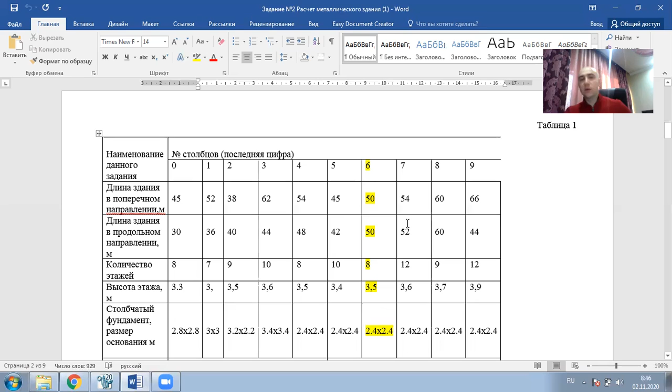Today we'll start statical calculation of the metal frame in the program software LIRA SAPR. Actually, like in our previous projects, we need to start with the initial data. So let's look to table number 1, and here we find the main information about our building, about constructions in our building, which I will accept.

Especially for this building, I will accept the last number of my ID, I think it will be 8. So 8 will be the last digit of my ID. So for the beams, columns, foundation, or wall, I will accept initial data according to the first letter of the surname, and I will accept from the S position.

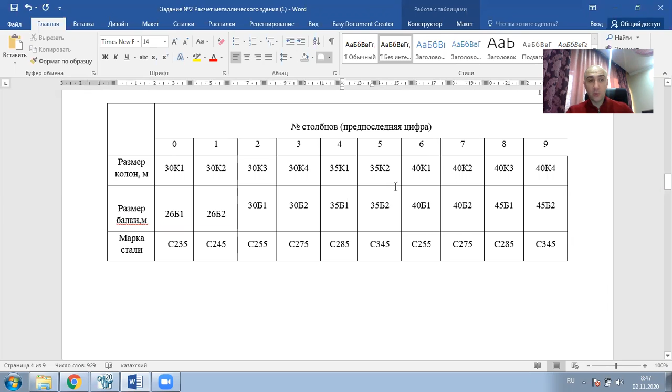And the pre-last number will be also 8. So 88. So what I have? I have that the length of my building is 60 meters. The length in cross-sectional direction also 60. There will be 9 levels. Each level has the height 3.7 meters.

For foundation, in this case, there will be column foundation. We know that in our previous project for monolithic buildings, the foundation was a monolithic slab. So in this case, it will be column foundation. Also there is monolithic slab overlapping with the thickness 150 millimeters.

Okay, let's start. We'll start from opening a new file, creation of a new document. Let's give the name like steel frame building. Okay. So we need to go to the generation of space frames.

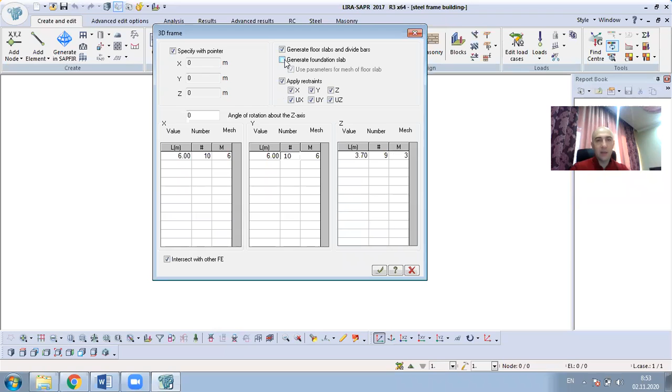The height of one level is equal to 3.7 meters. According to my initial data, I have 9 stories. I will accept 9, and the mesh I will apply 3. So here let's see. Use parameters for foundation slab. So we don't need the creation of slab. Divide for slabs, there's also no reason.

So we see that when I press the button for generate floor slabs, there will be no mesh. So I will tell you why there is no reason in this case to create slabs automatically. That's all because we need to construct not only main beams like it was in the monolithic building, but in this case we need to add secondary beams.

Monolithic building has the main beams in cross-sectional direction and in longitudinal direction. So in both parts there were only main beams. In steel buildings, like in monolithic buildings, the beams which are connected to columns between each other will be main beams, and the beams which intersect the main beams and are connected and supported by the main beams will be secondary beams.

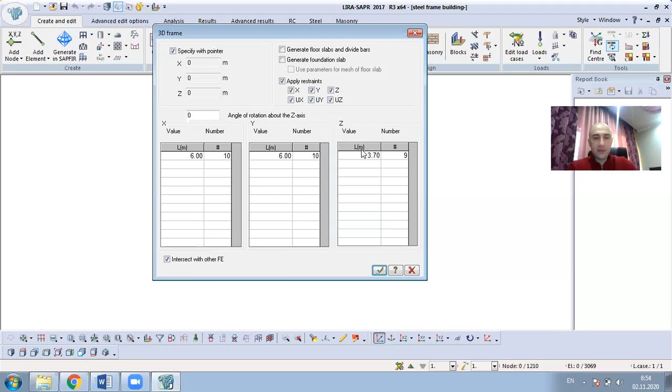When we finish generation of main beams and secondary beams, we'll start generation of the monolithic slab. Okay, so I press the button OK. So I have already finished the 3D frame for my steel building. That's it. So what will we do? Actually, we can start from creating material properties. So we can add the stiffnesses for our main vertical and horizontal elements in our building.

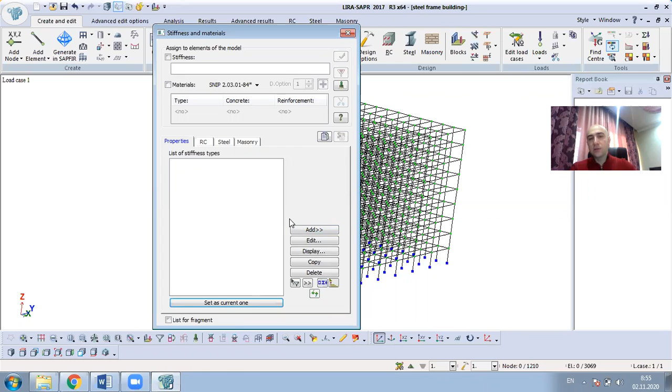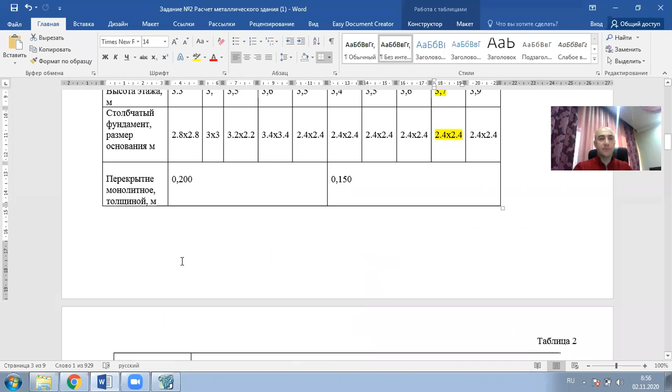Okay, let's start looking at our task. I suggest you start with the vertical constructions, columns, then create the main beam, secondary beam, and only after that create the monolithic overlapping and monolithic slab, and then finish by creating the column foundation. Okay, let's start. Columns. So in my case, it will be 40K3.

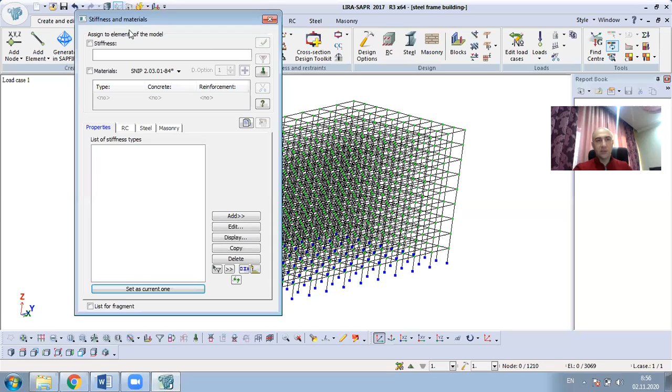So I go to the stiffness materials and press the button to add this stiffness, or add the section. It will be more right. Add the section of the beam or column. So for my beams and columns, I will use I section. I choose it by double pressing the left button of the mouse. Then I go to the profile, and here I need to use the I-beam with parallel flanges, the type K column, and here I choose 40K3.

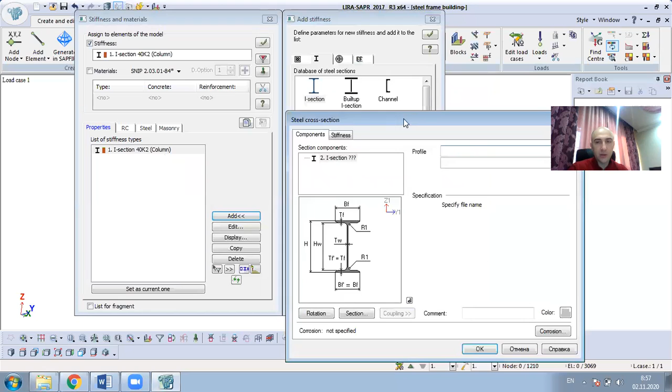So here I can write the name of the vertical element: column. Next, again I choose the I section, and in this case I choose it with the normal beams, because it will be for my main beam and then for secondary beam. So the section for my main beam will be 40 sheet 2.

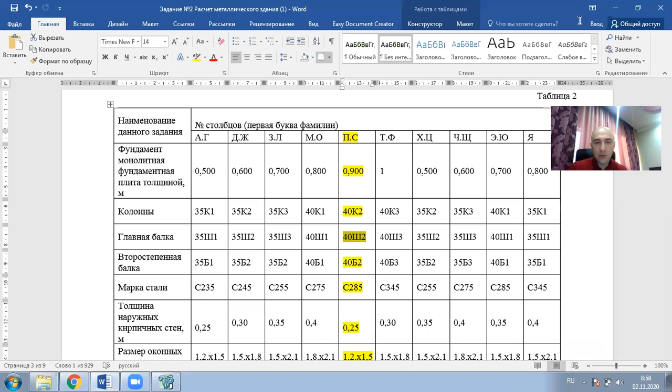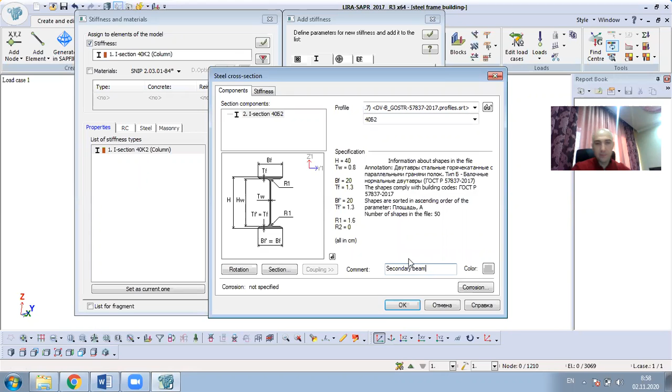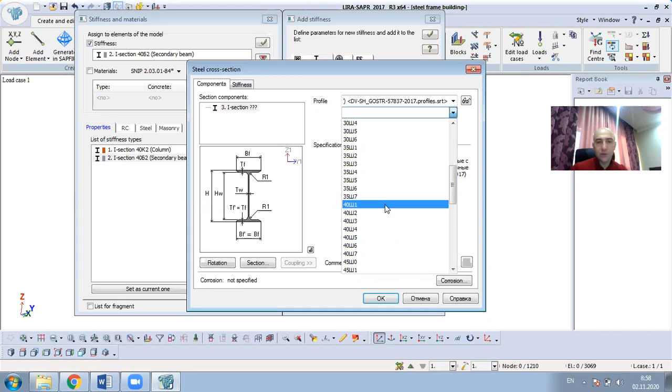Okay, first of all, like I choose for the normal beams, I will create the secondary beam. It will be 40 B2. 40 B2. And I will write here secondary beam. Then I will use the variant with the wide flange I-beams, and here I will choose the 40 sheet 2. It will be my main beam. Okay.

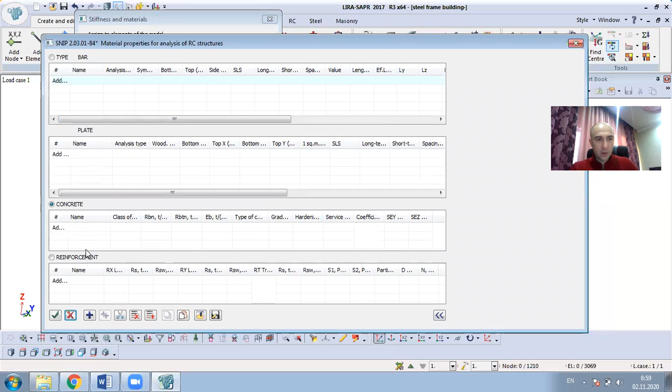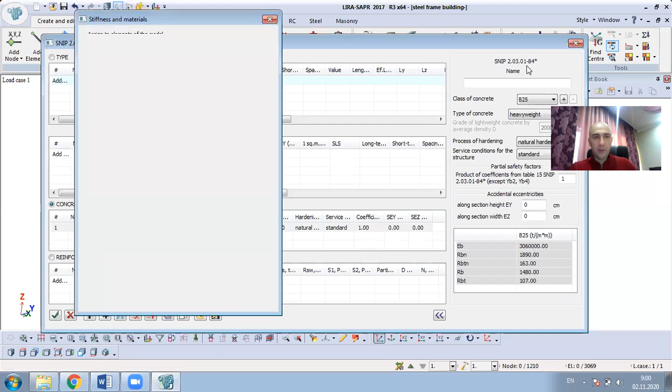Go next. The next will be overlappings. Overlappings. So for my overlapping, I will use the concrete with the mark 25, and here I will write concrete edit. Let's see characteristics 25, the modulus of elasticity. So I will write 306 and also 4 zeros, 4 times 0. Okay, add 6, 1, 2, 3, 4.

Okay, so for plates the Poisson coefficient will be 0.2. 0.2, right. The thickness will be 15 centimeters. Density of the monolithic slab will be equal to 2.5. So in the comments, I will write slab, maybe monolithic slab, monolithic slab.

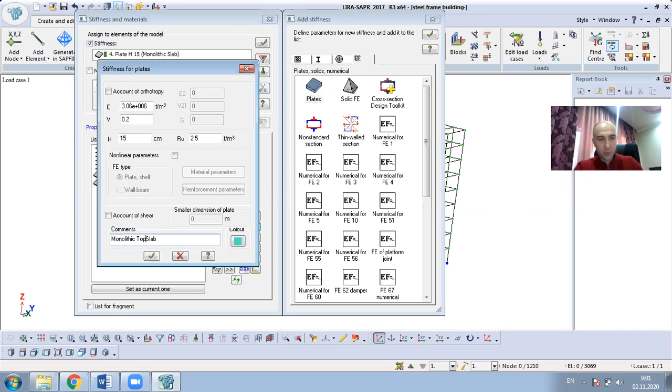What else? I can make the copy of this slab and edit it. And here I will write monolithic top slab. So top, it will be the last one of the 9th level. Monolithic top slab.

Also, we need to add the stiffnesses for our foundation. So the column foundation consists of two main elements. It is vertical bar, so it is the under-column part, and the second one is the basement. So the basement is required for transmitting the load from the column foundation to the ground soil.

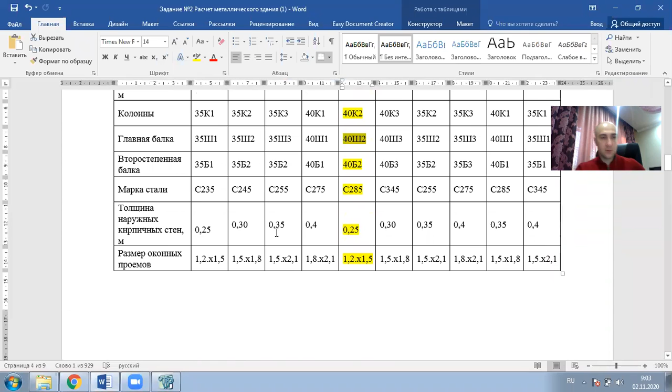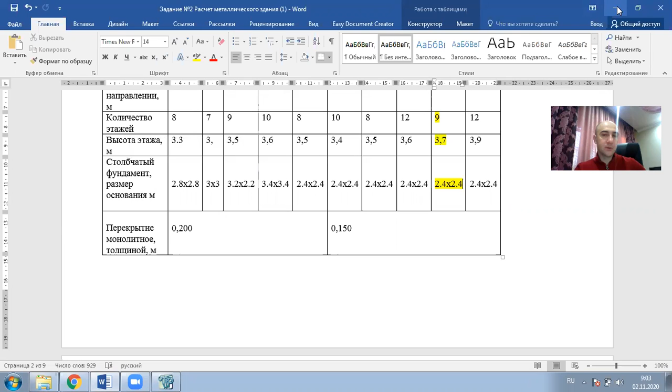So let's add it by using first of all the rectangular bar section. Let's see, here can be found the requirements for the column foundation. So I have size 2.4 to 2.4 meters. Okay, 2.4, 2.4. And the size for the column part of the foundation, I will use maybe 1 meter to 1 meter. 1 meter, it will be enough, or maybe 800 millimeters to 800 millimeters, maybe 80 to 80 centimeters.

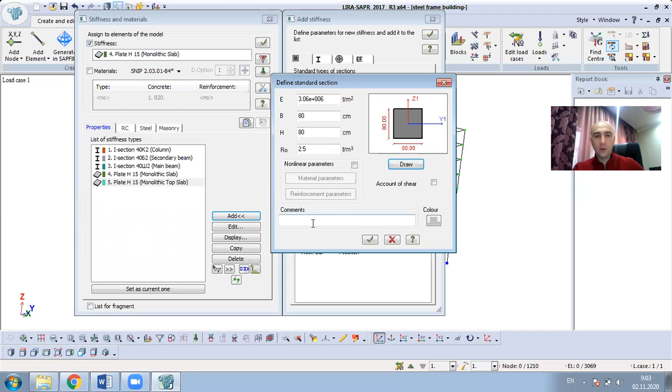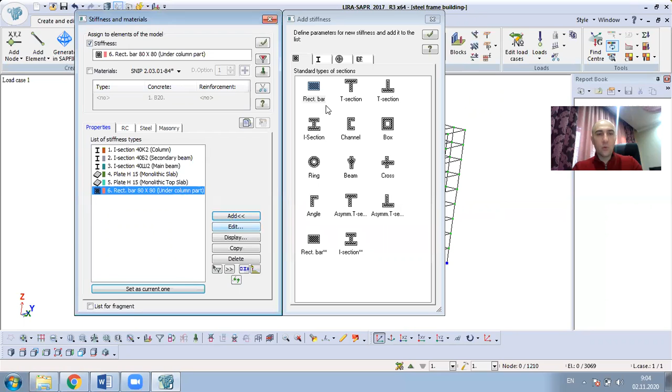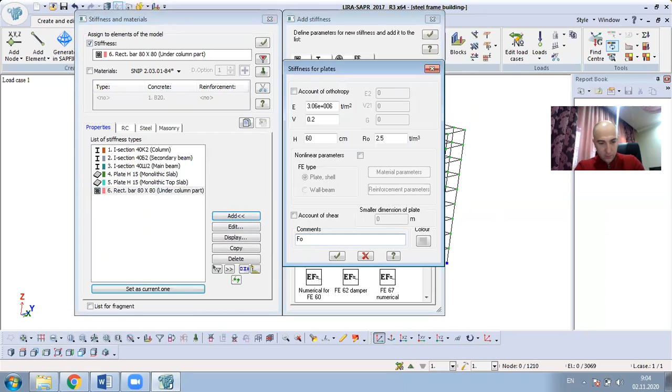So here I will write under-column part. And also I will add the plate. It will be my basement. So it will have thickness 600 millimeters or 60 centimeters. Foundation base. Foundation base.

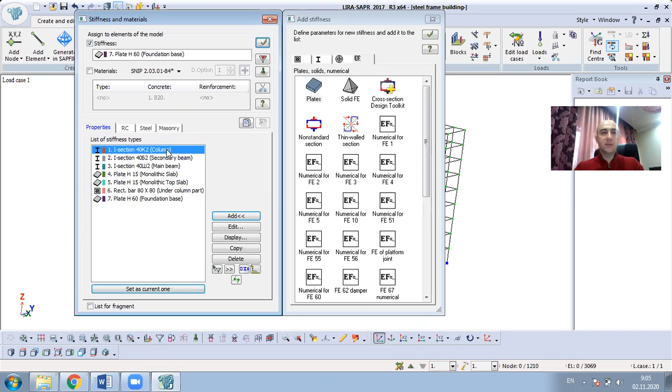That's all. So we already finished fulfilling the list of stiffness types, and now we can add our stiffnesses to our frame. So firstly, let's choose the stiffnesses for columns. All of us remember the ways how we can select our frame. So first of all, we can use the option like select vertical bars, and from left part to right part select only vertical elements.

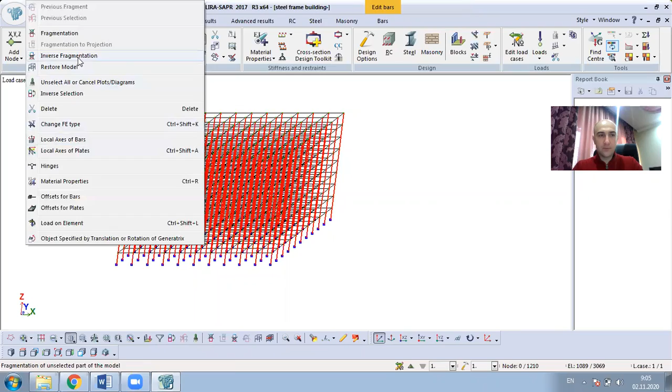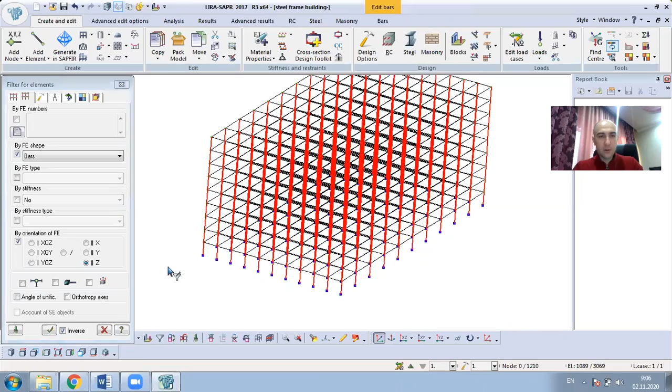Restore model. We can use option poly filter, and in the second place, filter for elements, we can go to the elements, for example bars. In this case, it will select all bars, horizontal and vertical. But in the orientation, if we use only Z direction, it will select only vertical elements. Okay, so we'll use this option of selection. Okay, so we have already selected. Let's go to the column, choose the column, and now we need to add the steel properties.

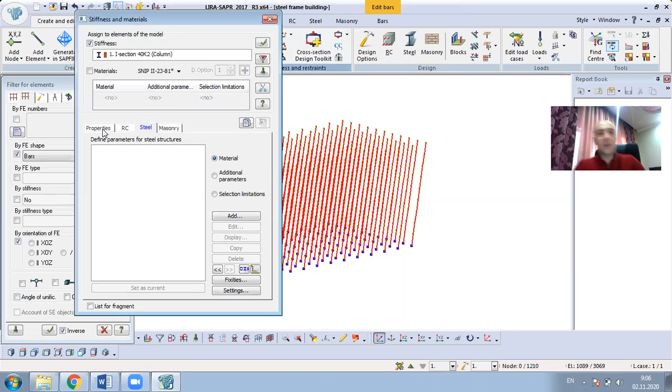So I recommend you to do it like I say, because actually you can just select and add only properties, but without additional properties. So additional properties and parameters, I recommend you to create immediately when you add the properties, or at the same time. So let's go to the steel. Let's look at my task. What about mark of steel? I have 285 for the steel. So in this place I will choose 285.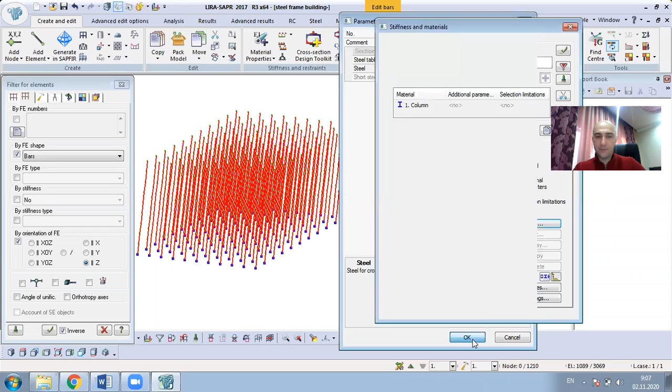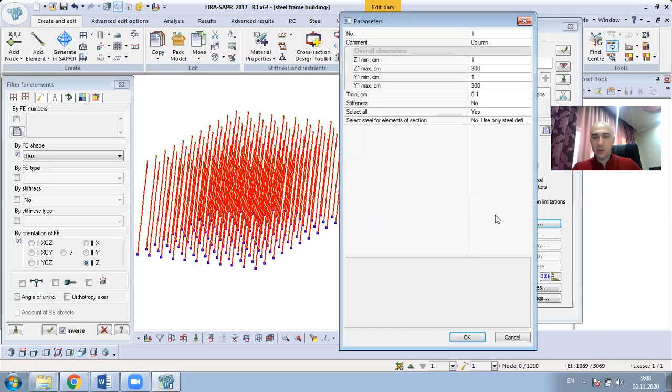Additional parameters. So for columns, let me 1 second. For columns, okay. We will use the conditions γc 0.85, and for buckling and strength will be 1. It will be principal column, and here I can use the element 1, effective length. Press OK, and the selection limitations will not be changed by us. Now I press button on the material and apply our stiffness. Number of sections, okay, will be 5. Okay.

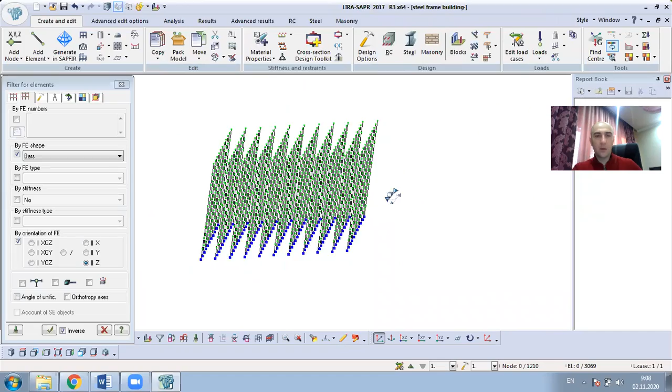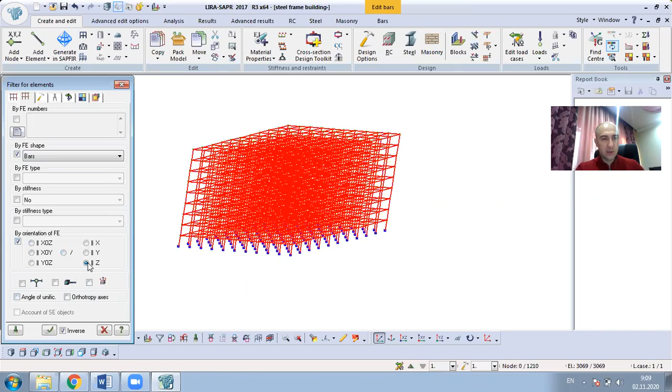So we have already finished with the columns. I press button restore model. Then I go again to the bars. Now I will select firstly all bars. Then I will select according to the Z direction. So I see that now the columns are not selected, and press fragmentation.

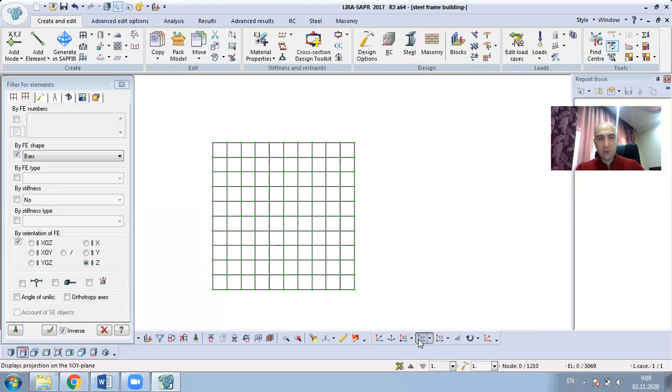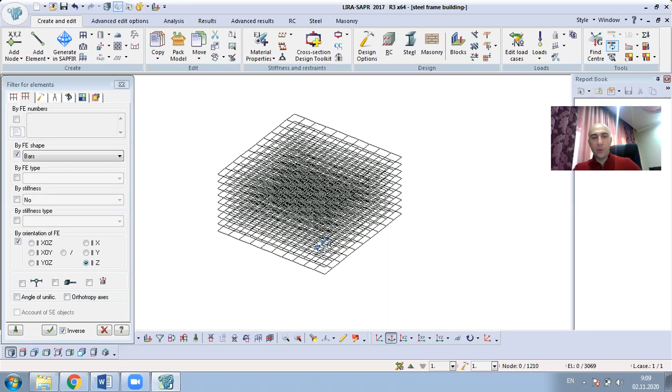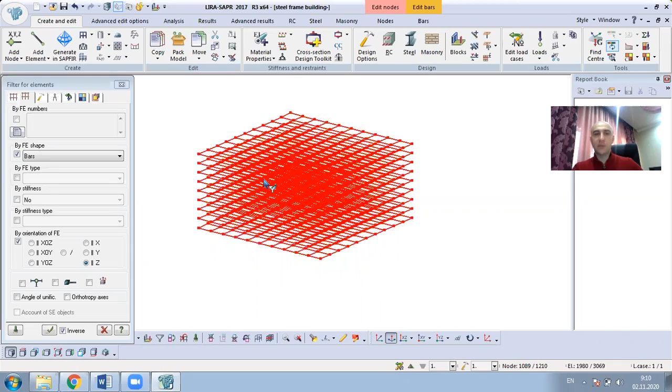So here I have main beams. Here is only main beams without secondary beams. So creation of secondary beams will be made by us separately. Now we'll work only with the main beams. So I select main beams. Now I will use the third variant. It's by using the buttons Control A. So Control A, it's an operation which I used in many programs. It helps us to select all things that are in the program. Yes, so I will use this Control A.

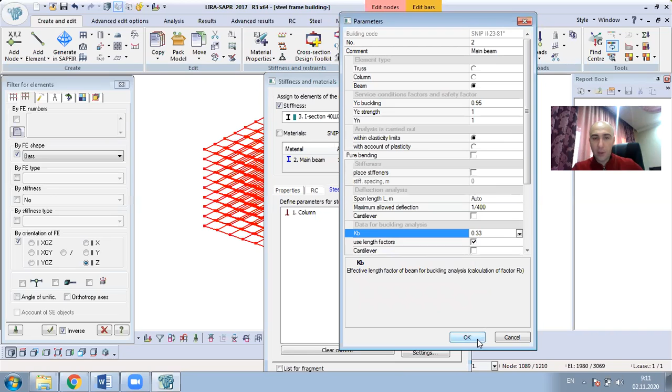Now I'm going to the material properties, select main beam, go to the additional properties, material for the beam. I will select the same like for the column. Additional properties for the beam in this case will be 0.33. For the buckling, here the condition factors will be the same. Let me see. For beams. Yes, will be the same. Okay. Press button. Okay. Select. Okay. That's all. Materials, and we apply our section again for 5 number of sections. Okay. So finished. Restore.

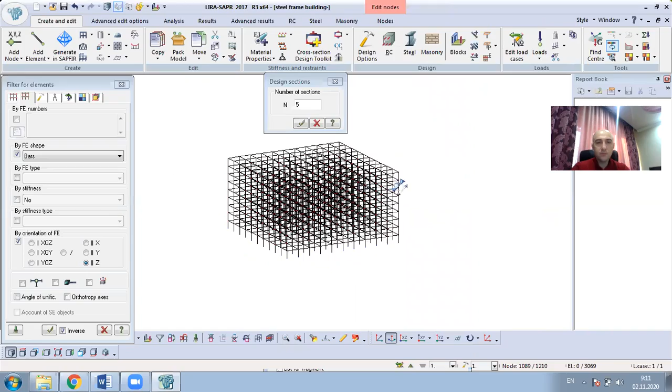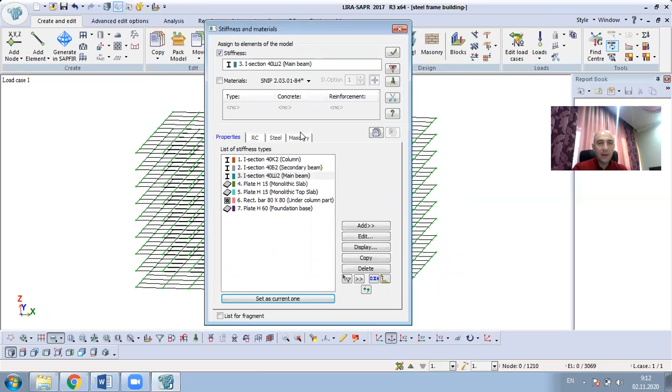Okay, so what else? Before I start adding the secondary beams, I want to do something with my main beams. First of all, I will select them and make the fragmentation. Next, I will again select them and go to the bars. In this case, I will need to create the structural elements of all of them. Now they are structural elements. Being structural elements, we can add the deflection fixities. So we'll use deflection fixities on the ends of structural elements.

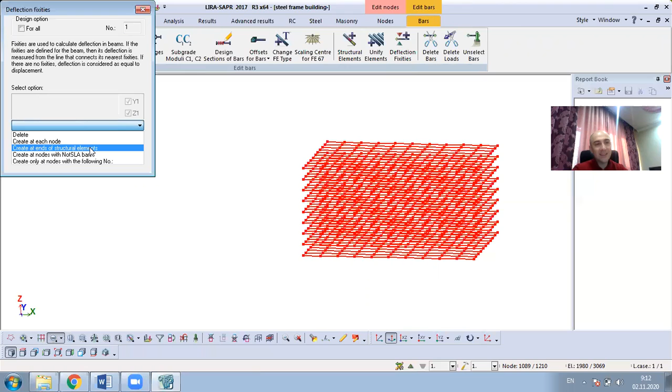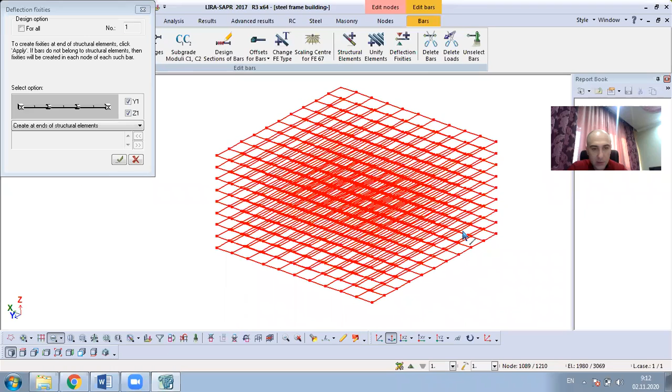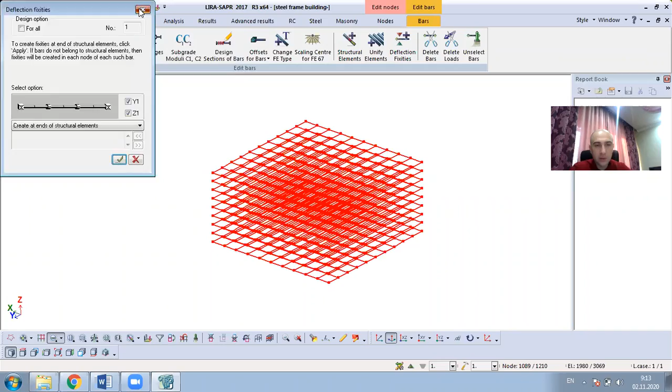Okay, now we added, but not at all constructions. Let's see. I will delete all of them. Or we'll try again to see if deflections were created on all elements. Yes, it was created. Okay. Now I will restore my model. And so what will be the next step?

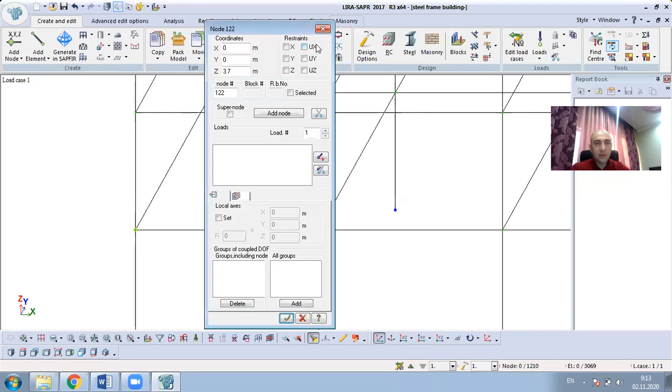So the next step will be to add the additional beams, so secondary beams. The secondary beams will be added by us with the step 1 meter. So to do it, we need to make the copy of, or maybe just we need to add one special node. So I will look at information about this height 3.7. I will use the option add nodes by the coordinates and will here write 3.7, according to the x direction I will write 1 meter, and now I need to add this node in the opposite part of this beam. It will be equal to 6 meter in the y direction.

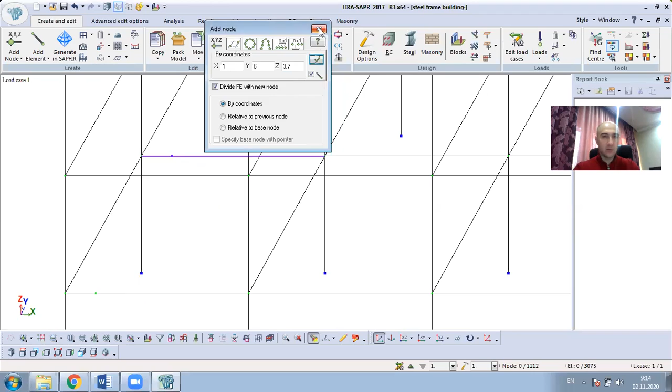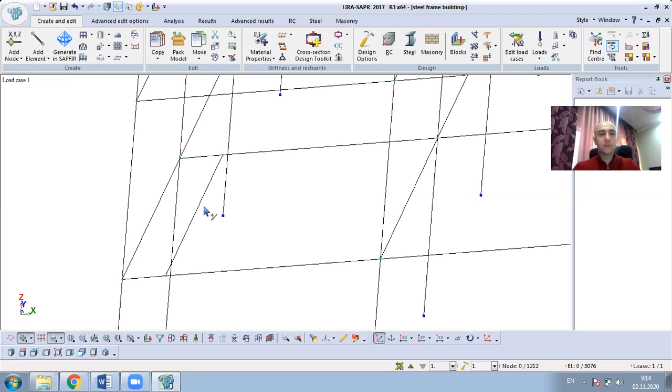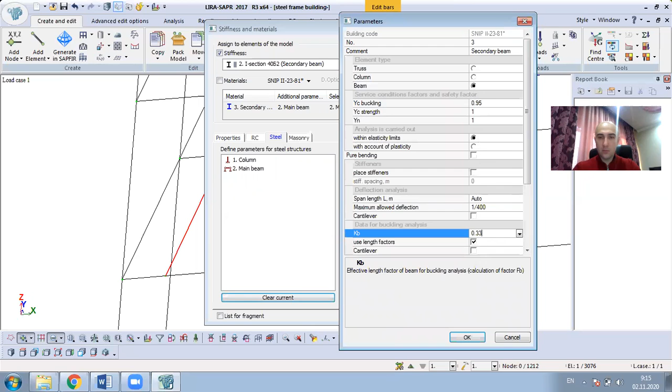That's all. Now I will choose the secondary beam, use the element, and will add the beam. Now I will select it, go to materials, steel, material, I will add the same like for previous ones. Additional parameters will be also the same. And the section limitations will be the same. Material, apply.

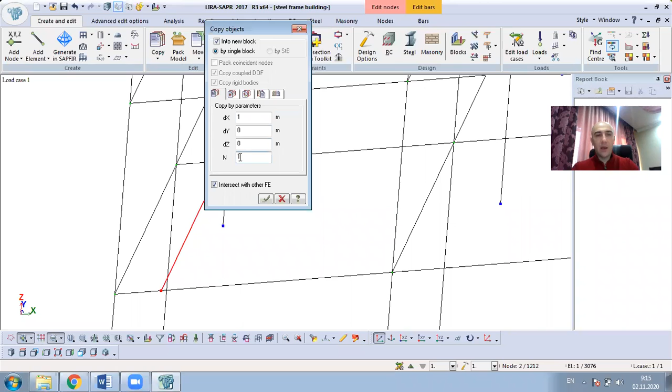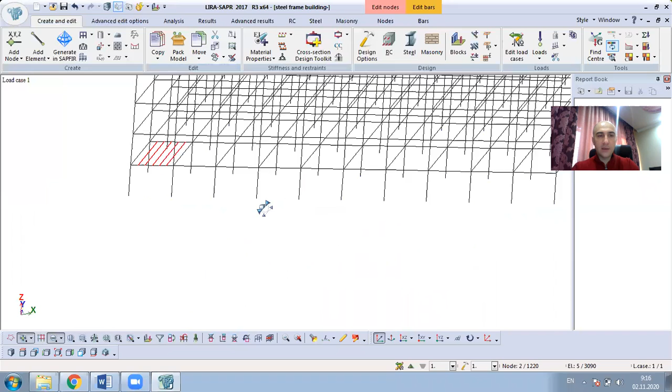So now I can make the copy of this element. I will copy by the parameters to the direction x-axis. I will write 1 meter, and here I will write 4 times. So now I see that there are 5 secondary beams between main beams. Now I can select all of these five beams, and I need to make a copy for all my building. So I will go to the copy parameters. I will write 6 meter, and I will write, if I am not mistaken, 9 times. Yes, that's right.

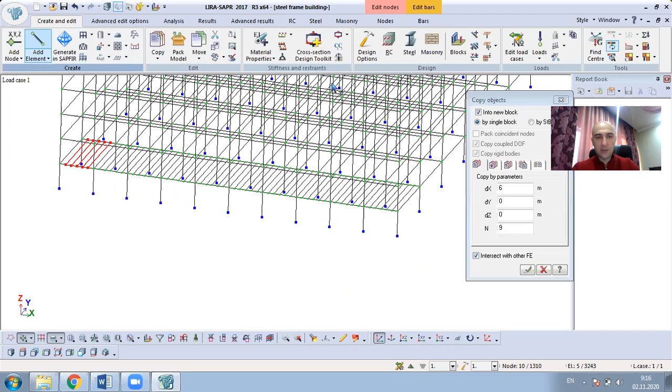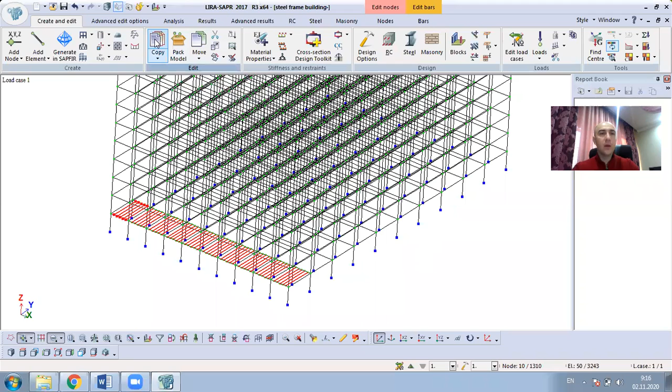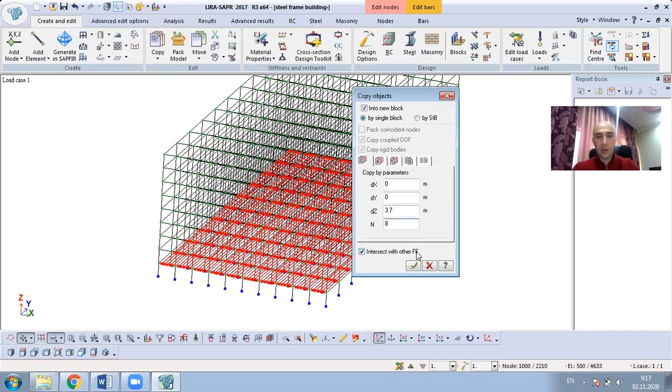Again, I need to select all of them, and now in the cross section direction, I will be able to make the copy of all of them in the y direction. I use a copy in this case for y direction, and at the same time it's 9 times. That's all. Again, I select all of them, and now I will make copy in z direction. Go to copy. I know that the height of my one level is 3.7, and there are 9 levels, so I need to add 8 times. That's all. And again I will select all of them and make the fragmentation.

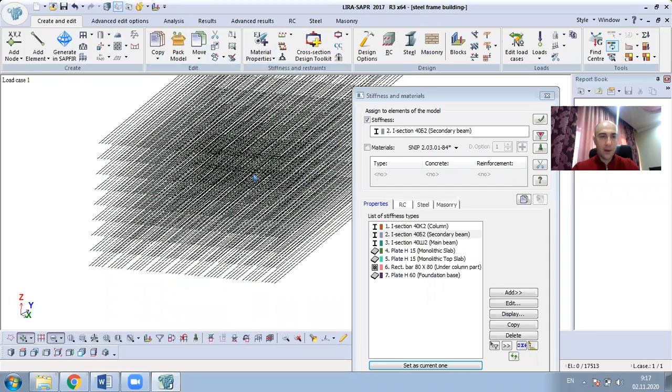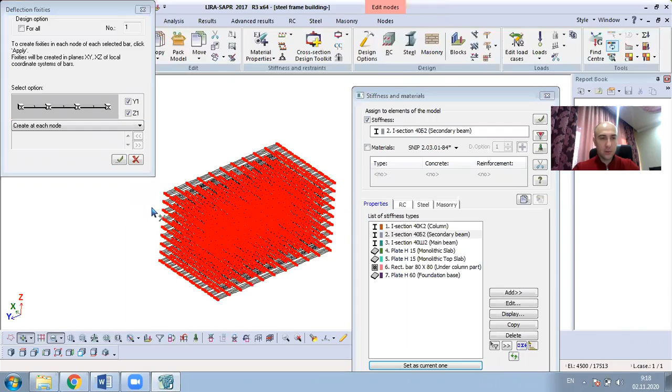So now you see that we have already added all our beams, and then especially for these beams I will select them, go to the bars deflections. In this case I will create a deflection at each node. So deflections were added. Restore the model. That's all for steel elements in my building.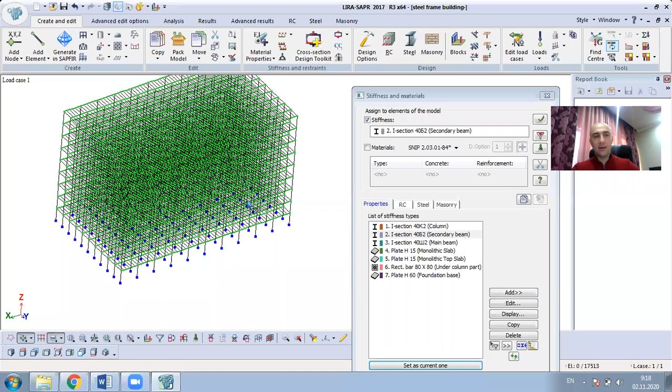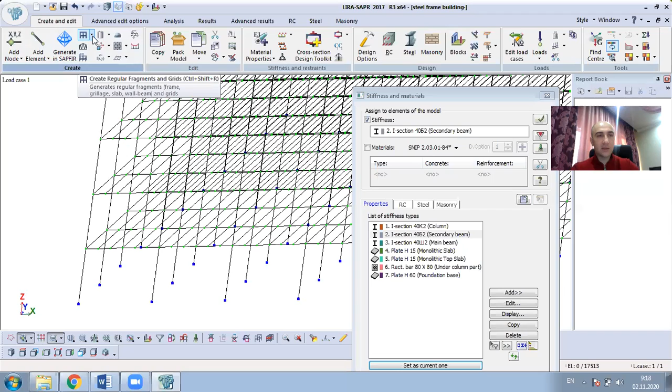Now what I need to do is adding the slabs, horizontal slab, monolithic slab. So this monolithic slab we will create or generate by the hand variant, not automatically, like it can be done by us in the beginning of the creation of the 3D frame. Now, in this case, we'll use the option create regular fragments and grids. We go to the generate slabs. Here we see two main directions, x and y direction.

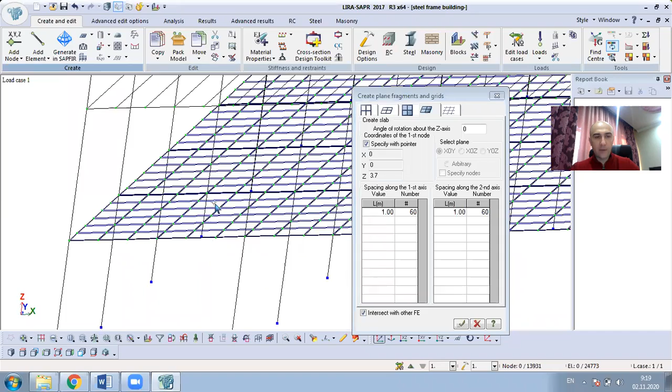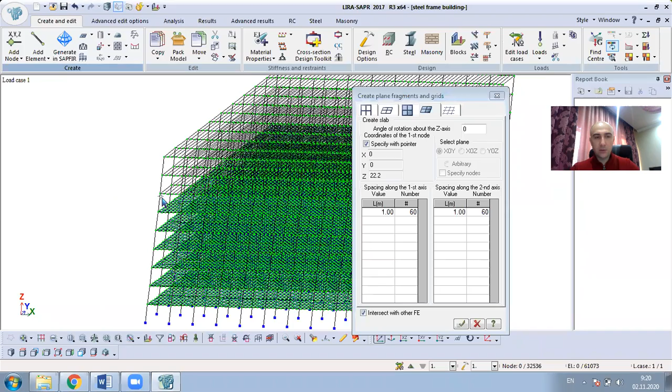So the length of my element will be 1 meter, and the number of times will be 60, as the length and width of my building is equal to 60. In this case will be also 60, and I will show the point of the creation. So that's all. I have already created my plate, my slab for the level. Now I can do it for all levels. So the same thing. I show the required node, and add. There are actually other ways we can make the copy of our slab.